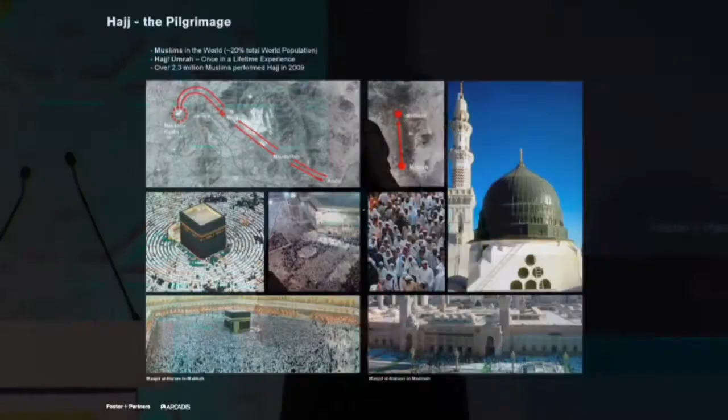Our interaction in Saudi Arabia started about 10 years ago, where we got involved in a project called Haramain High-Speed Rail, which is 4 high-speed rail stations linking the airport in Jeddah to Mecca and Medina, so pilgrims can come through Jeddah and then have this distribution to allow them to do it.

If you look at Haramain High-Speed Rail, it was 4 stations, actually very similar to Eurostar, but with probably 10 times the number of passengers. While Eurostar deals with 10 million passengers per year, we're talking about starting with 60 million and going up to something like 130 million.

What we designed, the stations are now finished and operational. We designed a modular system that could be manufactured off-site, brought to site, and assembled, designed like an airport. Because the passenger flows were so big, we had to separate arriving and departing passengers, and we came up with a framework which allowed through stations and terminus stations all out of the same module, but gave direct access to other modes of transport.

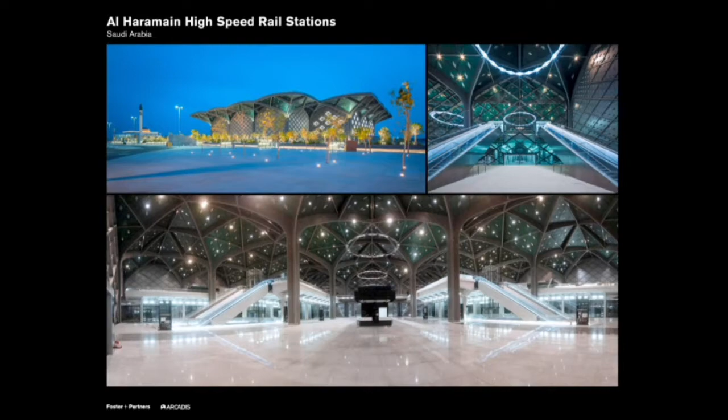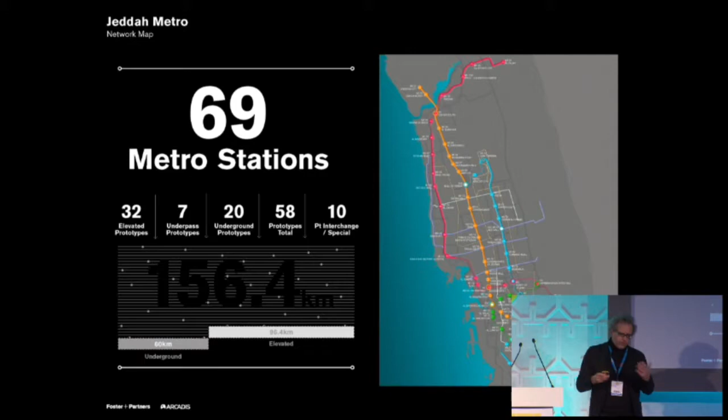When you look at the statistics of what we were being asked to do, it was something like 69 metro stations, 20 of them underground. We had underground, above ground, and interchange stations, all of which we had to design within the same framework.

We saw the ability that because we had a significant amount of overground station and viaduct, about 100 kilometers of it, the city had a distinct lack of public realm because people find it very difficult to go outside during the daytime due to the temperature.

But actually, the coastal area of Jeddah becomes animated at night when the sun comes down. So we thought, could we take advantage of the viaduct as being a huge shading device? It's significant, there was over 100 kilometers of it. If we did that, we could actually give back to the city something the size of about half of Central Park as a byproduct of putting public transport there, which we thought, absolutely, this is what we want to do.

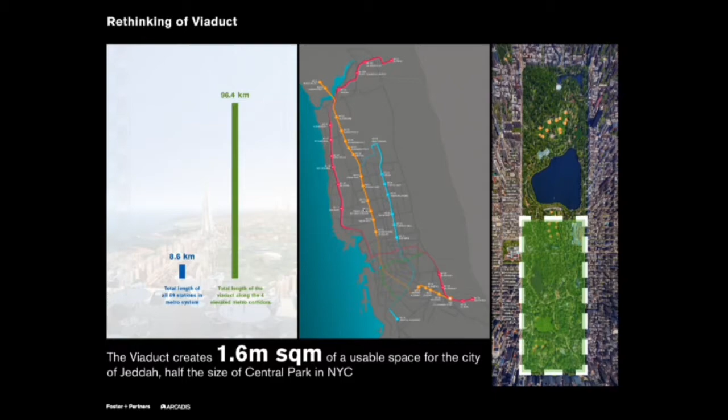There was also light rail tram and bus rapid transit networks. So the metro provided the north-south link, and the light rail tram and bus rapid transit provided the east-west links through the city. We had a ridiculously short period of time to design it.

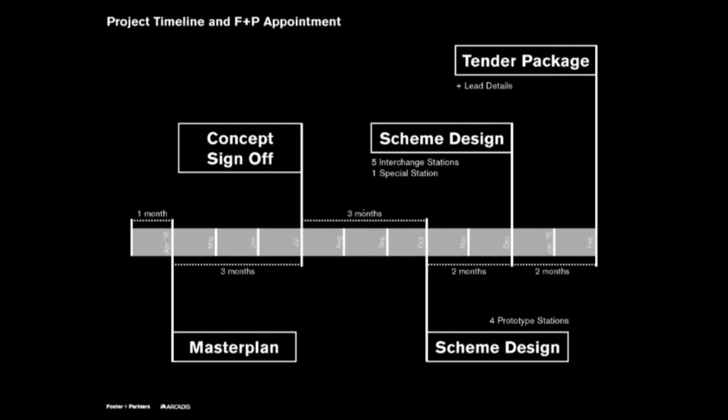They wanted it all finished in a year, so we had to give ourselves a very tight timescale and assemble a team within which to do it with the client. We weren't starting from scratch.

What happens with these massive transport projects is someone goes off and does a transportation plan, and in this case it was Systra, a very, very good company. But what they do is design a metro system, design a bus system, design a tram system, but they don't actually connect.

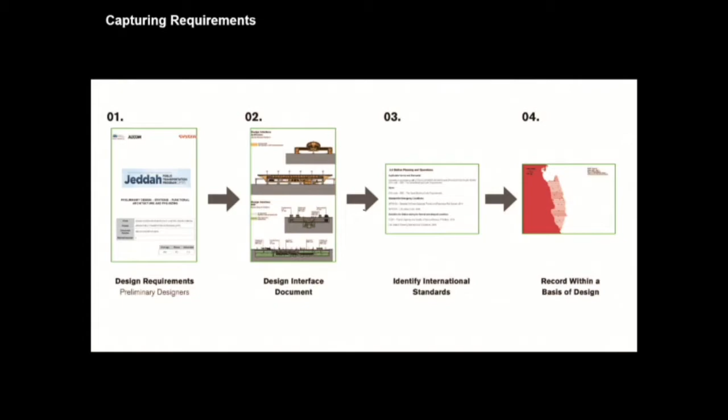They overlay it all, and it doesn't really work, from a city point of view. AECOM were off doing a build structure plan for the city, so we took all of that data, overlaid it, and played it back, moving the pieces around to help shape the solution. The scope was all-encompassing, from architecture to engineering.

We also brought in urban design. We were responsible for producing the cost plans. We chose to bring the real estate component into the project because we thought there was going to be funding. There was cultural identity to give it a local feel. We also produced branding, industrial design, and transportation design.

It was all about collaboration. So we wanted to create a culture of no surprises. It was only possible if the client was fully engaged in the sign-off.

So we amalgamated 250 people all together in one space. We created a design office in London and a design office in Jeddah.

And basically, we had a monthly sign-off process so that we never went backwards, we only ever went forwards. So the challenge for Jeddah Metro was, it's a sprawling urban mess, basically, 50 kilometers long by about 10 kilometers wide. It's grown from a small port in 1950 that hosted 50,000 people to a city of over 3.3 million. And just to make matters worse, 50 kilometres away from the centre core, they're building a 1 kilometre tall tower to host 200,000 metres squared worth of accommodation, to create a new town centre that far away.

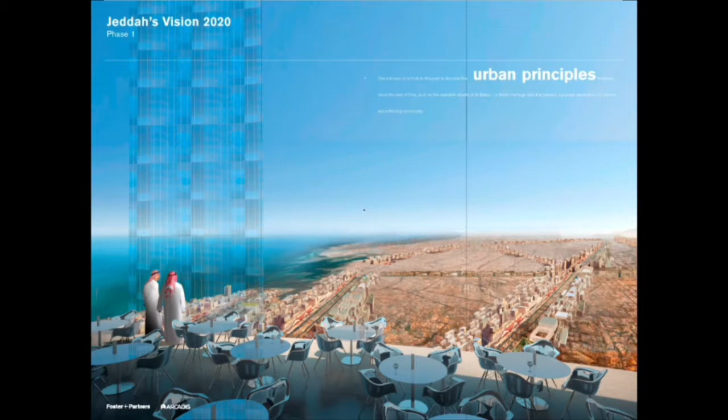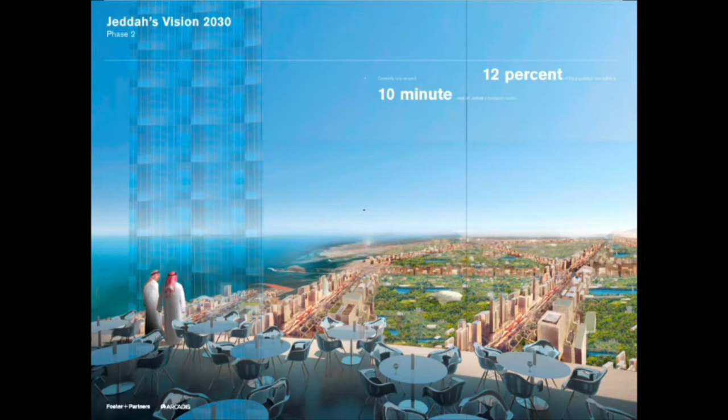So our challenge was to basically establish a plan. What we did was we looked at what had been planned originally and convinced them that to make the public transport work, you actually needed to densify around the public transport and not have this urban sprawl that went uncontrolled to the city. The original plan that we inherited basically had only 12% of the people living within a 10-minute walk of the public transport.

So we were, how is that going to work? Because you're going to have to drive to the public transport, to get on the public transport, and then drive to get to your destination. It's the wrong model.

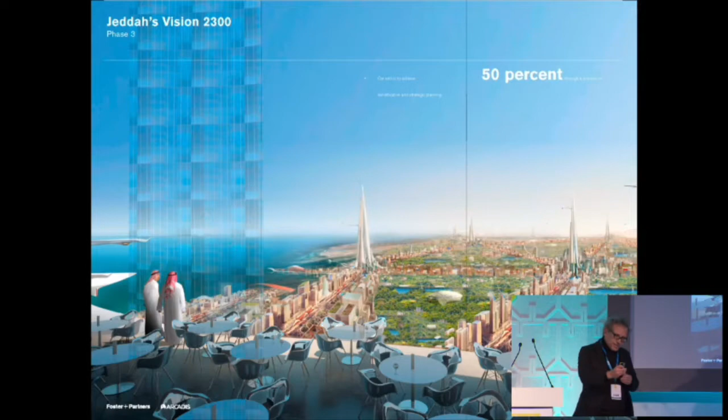We convinced them that the actual answer was to focus densification around the stations, with a particular focus on the interchange stations, and then begin to look at the lineage of the outer connections. What that does is it opens up the opportunity for much needed resources, such as recreation, food, power, to take place in the spaces in between the public transport.

So conceptually, we looked at a design where the stations should connect directly into the adjoining development and have landscape corridors that ran straight through it and retail corridors that ran the opposite way, then connect directly into another station that does the same thing. What this is actually doing is producing a network of public transport 1 kilometre apart that provides walkable distances in between and walkable neighbourhoods between.

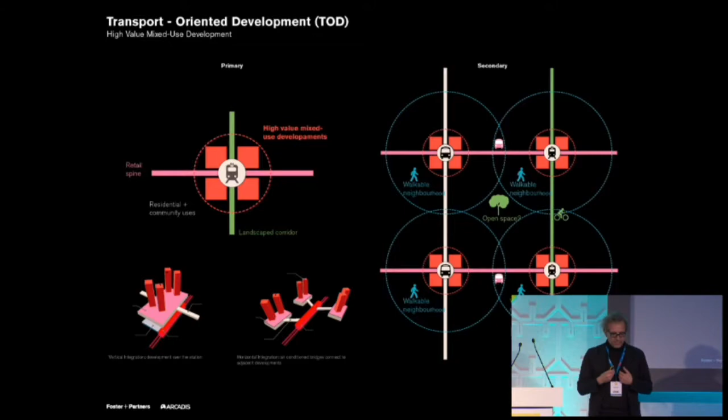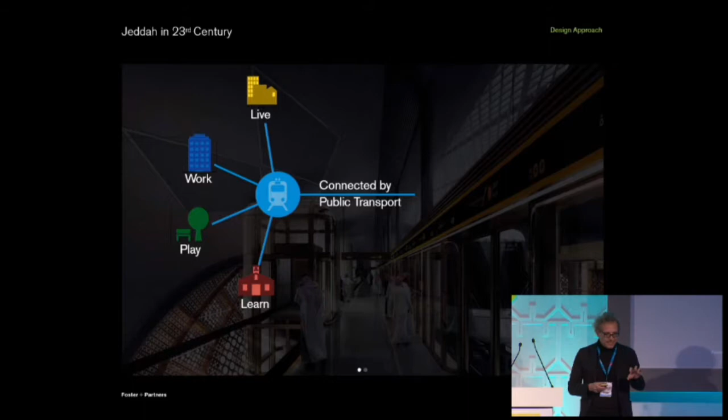It was touched on a little earlier in the discussion with Paul Finch and Andrew Worley, but this goes back to the old principle of what railway stations used to be. Railway stations really should be destinations where you have a mixed-use hub at that location, where you have live, work, play, all together, and learn, as a destination. Around the next station, 1 kilometre away, you've got a different mix, but it's a similar kind of hub, and you use the public transport to get between the two.

It was a full-on... oh, interesting, it's not playing.

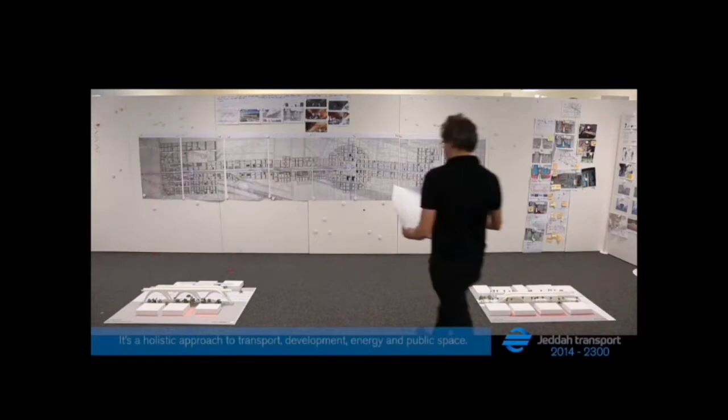So this was when we did the competition, we had to work very quickly. What we actually did was we had all this data to establish how to design it. But actually, we felt, let's put all the data down and create 4 separate stations, and therefore demonstrate how to deliver the 4 stations.

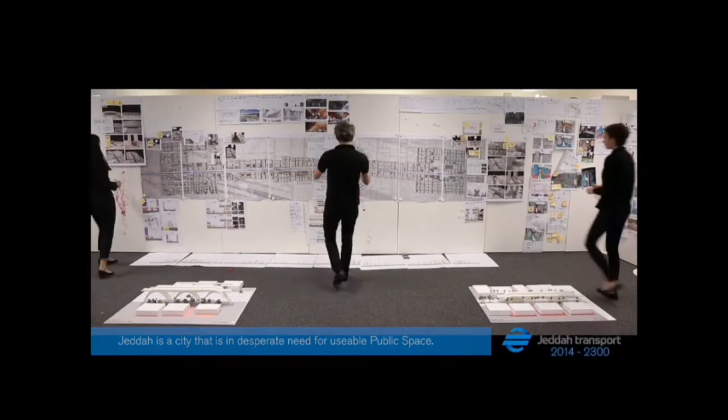We had how the station would work. We had all the criteria aside. And out of that, we produced a vision for how those 4 stations would look, feel, work, integrate, and grow the city around them. We also demonstrated through a sequence of models how you could phase the project, so you see here the station being in the center of the project.

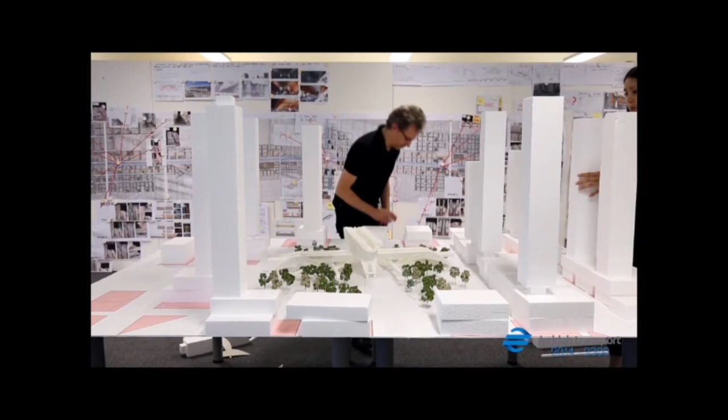When the station comes, we're envisaging that there will be real estate around there of prime value, and that will begin to develop around the station. Then you can develop the second line as it phases, and it could go over the top, providing direct connection between the two, so the densification would continue.

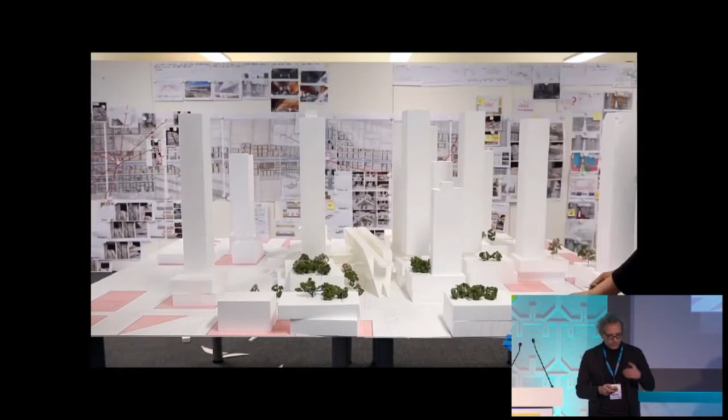As a model for how to develop this, we took the DNA of something we did in the competition, and our final solution just followed those principles. Ultimately, this is the scope we designed: metro stations, special stations, connection to development, BRT, and the branding, etc.

The rule we underpinned was, because we were building Haramain high-speed rail at the same time as designing Jeddah Metro, we actually had a test bed doing our testing for us. We were able to say, look, the design principles we originally sold you, you can now see them acting. One item was that when we took Haramain on, they wanted fully air-conditioned platforms and stations.

We said you don't need it. When you're on the platforms, it's a transient space. If you have heavy shading and good air movement, it'll be fine and it'll bring the felt temperature down. We were able to prove it to them, so we were able to use that evidence on the city.

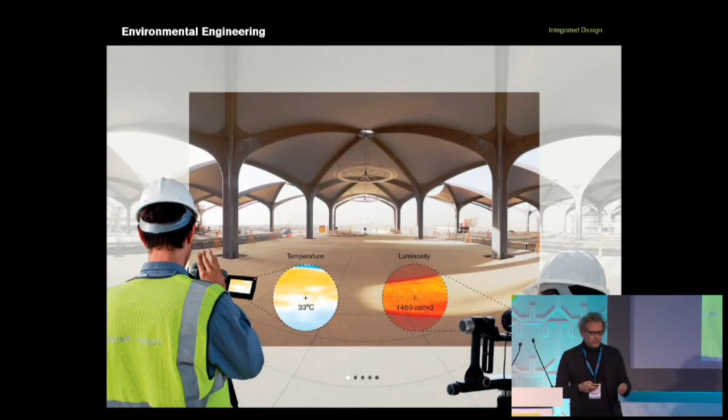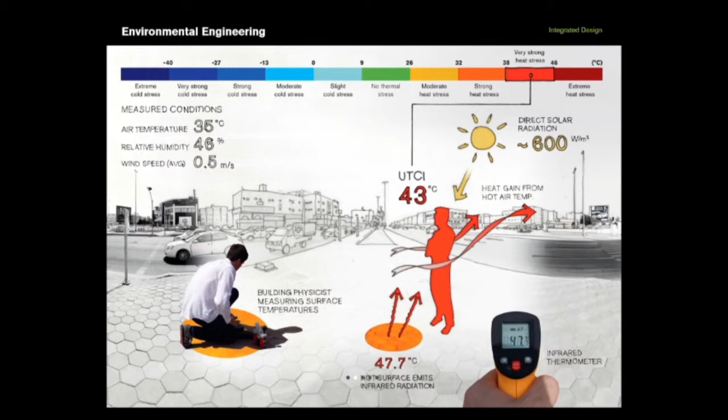Again, we went out into the city of Jeddah. We took measurements, looked at the direct effect of the sun, what it's doing to the urban realm, the heat it's kicking back, to identify the best way of developing these new stations, with the idea that you create an ambient temperature of somewhere between 24 to 28 degrees. We have good air movement and thermal mass within the station and the viaducts, creating a very sustainable approach to public transport.

In what is a very intimidating climate, cultural identity was interesting. We didn't want to come in as an international architect and impose our own aesthetic on this project. So we noticed something really interesting with Jeddah, in that it's grown so quickly there are no neighborhoods.

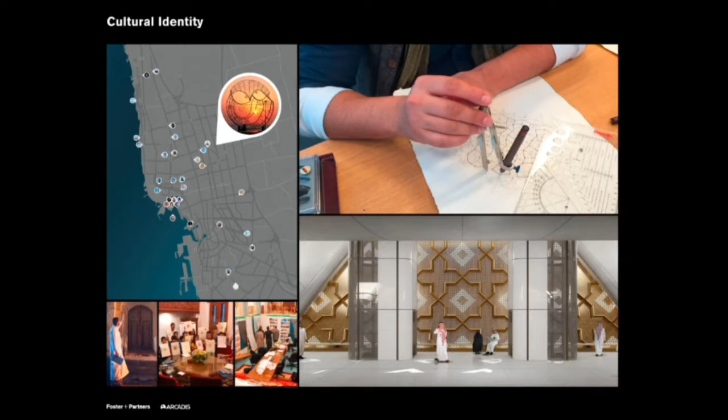What you actually have are these very peculiar sculptures, which anyone who's been there will have seen, in the middle of roundabouts, and public art has become a wayfinding device around the city. So we understood this big connection between public realm and arts, and we commissioned a sequence of 3 or 4 artists to work with us to help give the local identity and wayfinding components to the city.

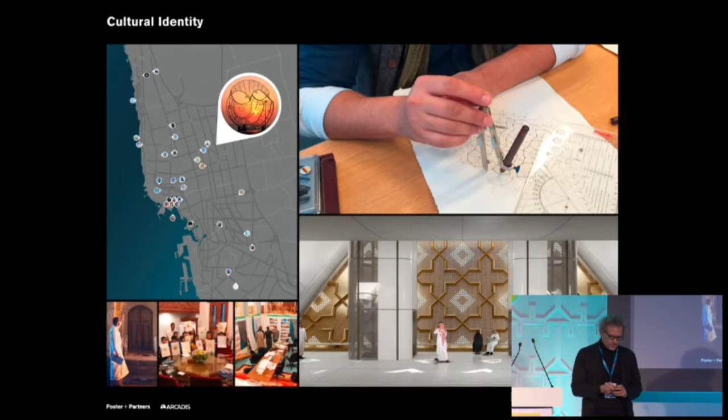So now to explain more about what we delivered: we actually delivered a metro station with 3 typologies. We had an overground station, an underground station, and an underpass station. An underpass station has to accommodate an east-west road, so it runs in a north-south direction.

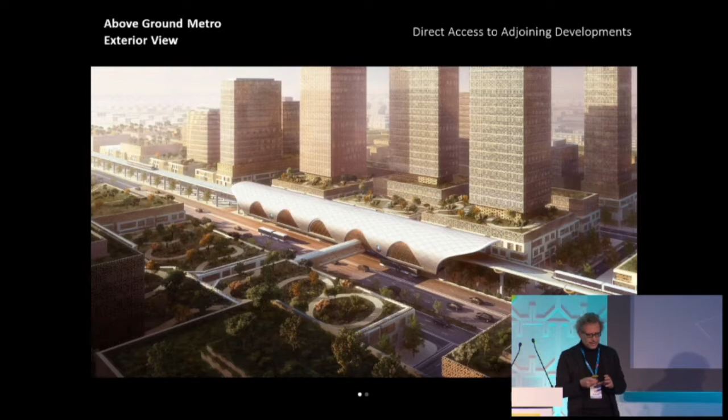This image ultimately shows our final vision, which was that the elevated station creates a pedestrianised public realm underneath it, for a pedestrian connection to other modes of transport. We also have these bridge links that connect directly into the adjoining development.

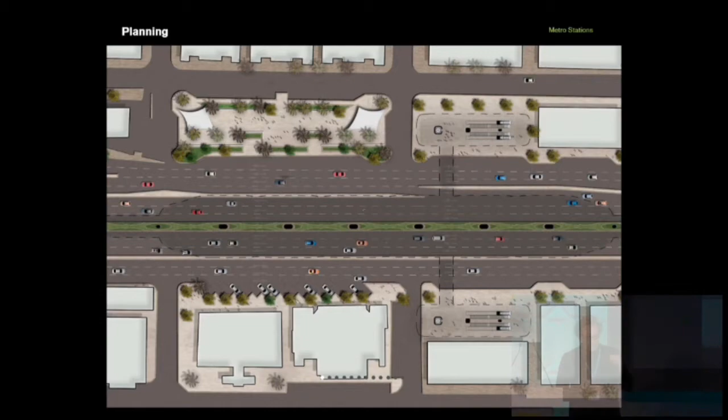If you look at what that looks like in plan, you can see some very challenging sites. Here, this was a 12-lane road where there was no way of providing a pedestrian crossing. So what we did was, we knew that in the future you don't need 12 lanes, you'll need 6 lanes, 2 lanes. It'll evolve, so let's design a station that can straddle it and put it up in the air.

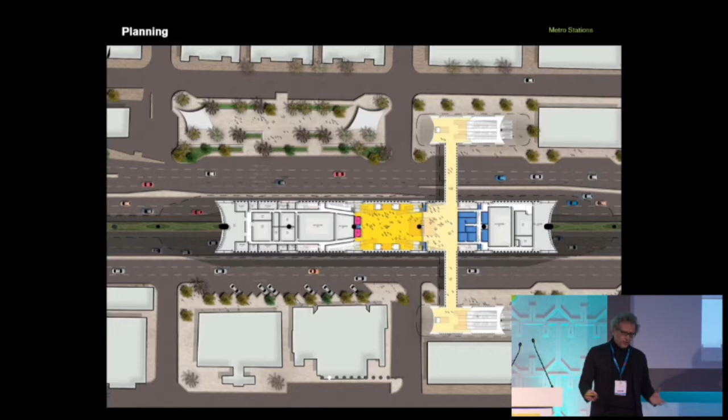At the beginning, it can provide a much-needed bridge link, so actually there's an unticketed bridge link. You come up the vertical transport, cross across unticketed, and come to the other side. The stations are easily planned so that on the right-hand side you have the ticket machines and staff areas, and on the left-hand side you have the gate line and concourse with access up to the platforms, with the ancillary buildings at one end.

And you go up then to a platform. The platform then gives you connection to the trains.

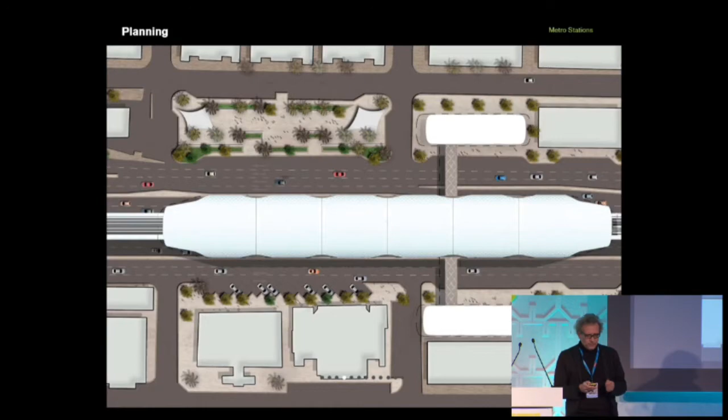We looked at this and we thought it needs a lid on it. Obviously it's got to keep the climate out, but there's real benefit in making this a modular system. When you look at the passenger numbers, some of the city is already there and it's very dense, so it needs a big station, but some of it's desert. It's future-proofed for capacity. So why would you build a station the same size in a desert with 1 or 2 passengers as somewhere in the center with thousands of passengers? So we designed a system that could be added to.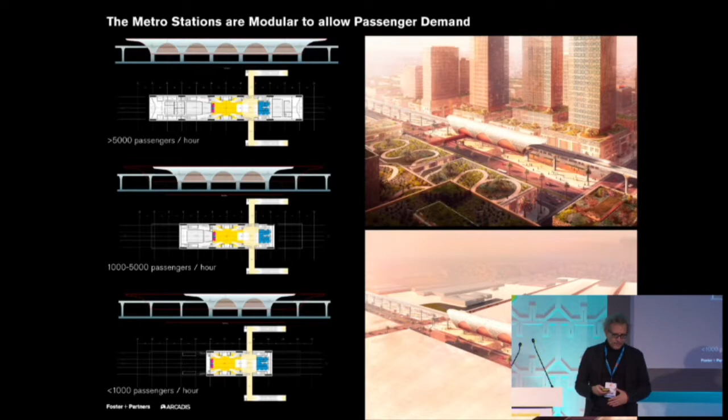We also looked at designing a system that could allow the road to not be 12 lanes anymore. As the public realm begins to move under the station, you get the benefits of shading, and the ability to come directly up into the station from below. The real estate on the left-hand side gains that public realm as part of its ancillary space.

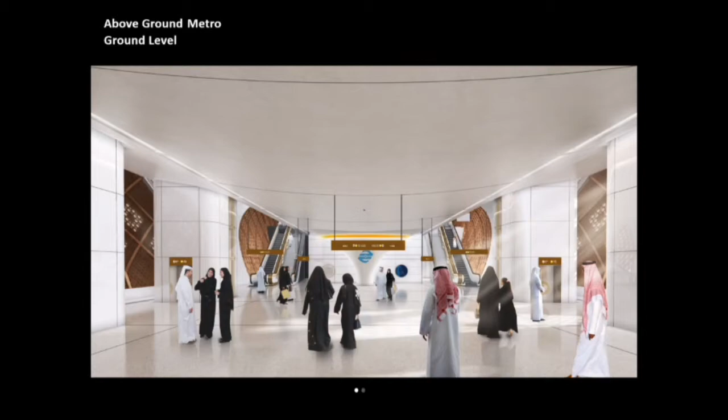You come up to a very simple concourse, which is minimal in the way of wayfinding. It's pretty obvious - you go through the gate line, head for the escalators, which take you up to the platform. From the platform, it's all carved away so you feel like you're part of the concourse, but ultimately you're directly accessible from the train, from the platforms onto the train.

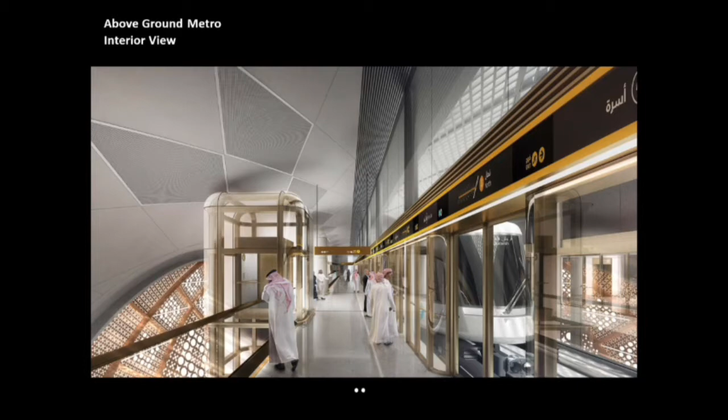You see here how we're envisaging that the real estate, the shops on the left-hand side, can occupy the space outside and take advantage of the lack now of the road. The road has moved to the other side of the station. It's part of a phased development, but it becomes part of a sequence of events.

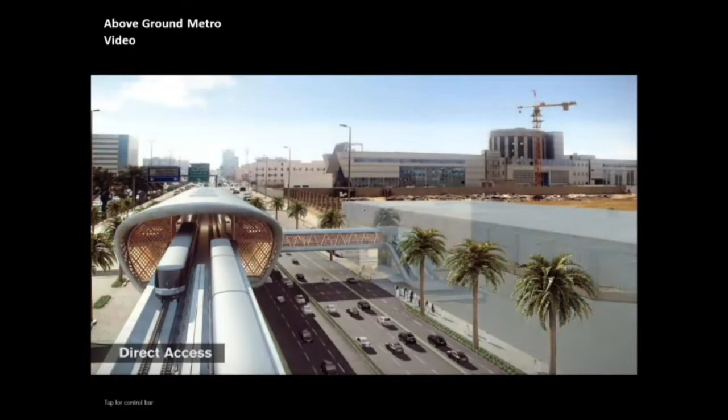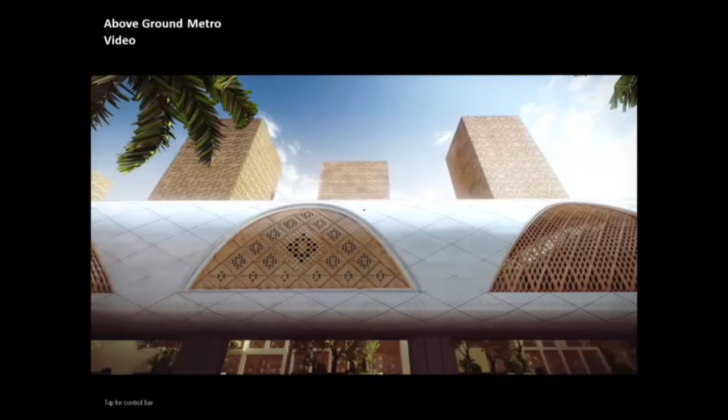This shows you the experience of how we're envisaging it to work. You'll come up the platform onto the concourse, and the concourse leads you directly onto the platforms. This also shows how the development allows transition of the adjoining development on the side, because on day one that development probably isn't there, but we don't want to preclude it happening in the future. If anything, we want to allow it to be a very easy transition.

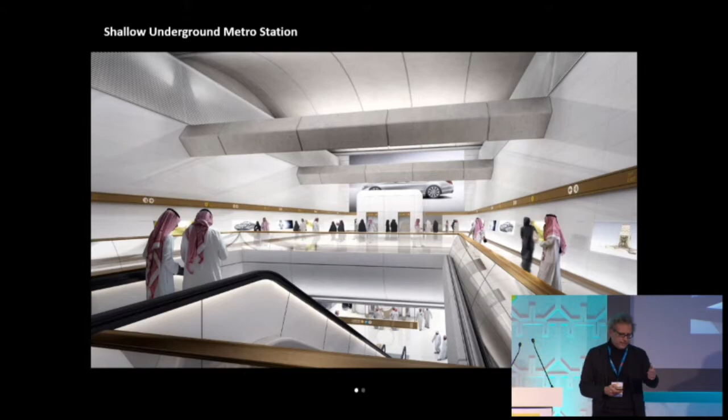The underground station works in exactly the same way. It has this unpaid route under the station, under the road, then the gate line, and then the station. Ultimately it's a shaded concourse that provides the linkage and protection at street level. We've designed it where we, as architects, express the structure, so you can clearly see the structure where props support the cut-and-cover box or the vaults support the road. And then there's a very clean ribbon-like wayfinding that runs through this platform.

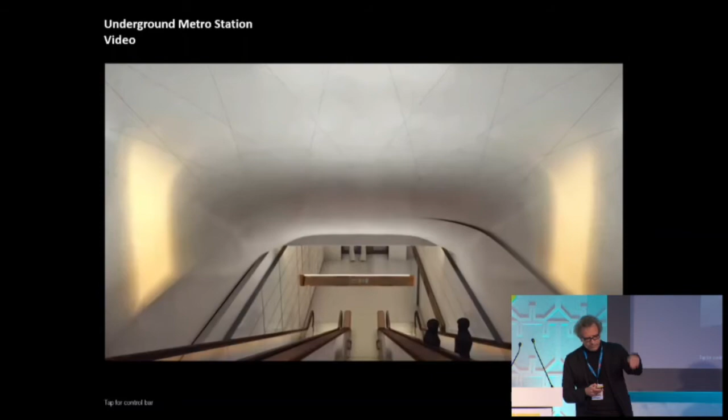This is a little video that just shows the sequence. You can see that you're coming through an unticketed gate line, down the escalators, through the gate line, and passing through the space down into the platform.

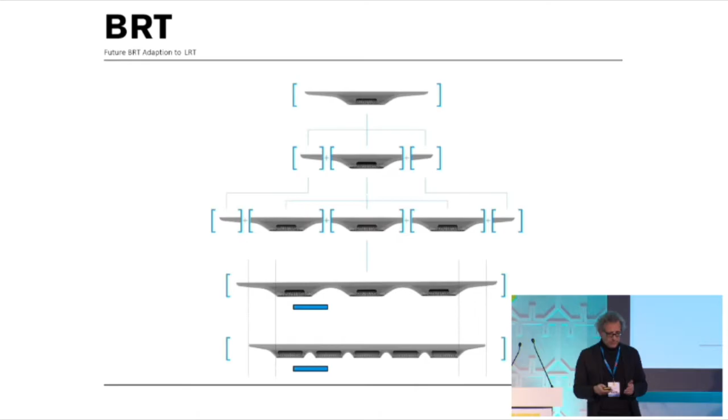We also found there was very little difference between a bus rapid transit system and a light rail transit system. So why are they two separate systems, and why does it cost so much to make the transition between the two? Why not design it as one system? So what we did was design it as one system where the bus rapid transit platform was 45 meters long, as you see here, and the bus runs on there. They both have a designated route.

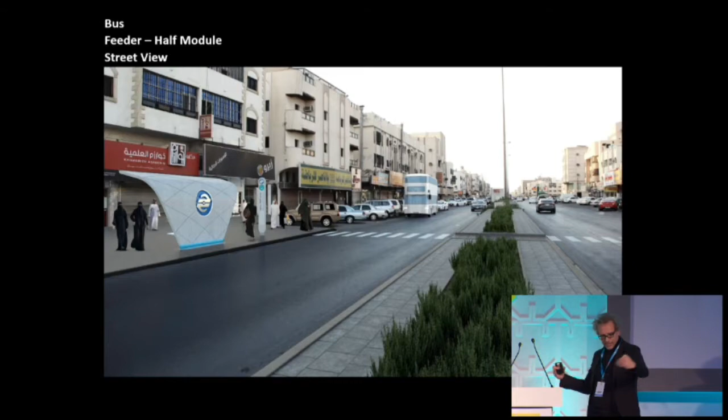There's also the ability in the future to electrify the road, and then you increase the length of the platform as the trains are 90 meters long and the tram runs through. We also designed bus stops - this was quite a challenge because we had many different sites. So we designed a very simple kind of branded sunshade, let's call it a shaded wall, that you put in the direction of the sun. You hide behind it and get clear access as the buses come linearly.

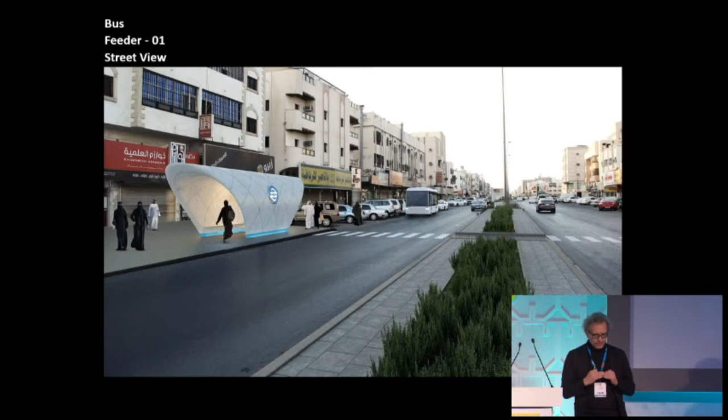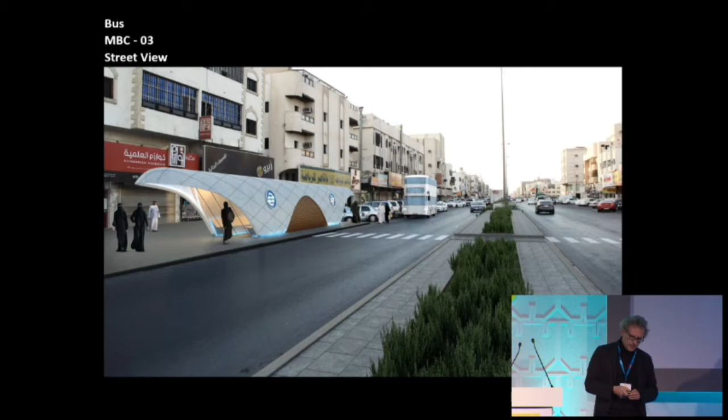Where we have slightly more space, we have the ability to attach two shades together, providing an immersive sunshade. Where you're coming into the more built-up areas, we have the ability to air condition it in the center. And when you get to the more dense areas in the center of the city, we have the ability to expand its length and size accordingly.

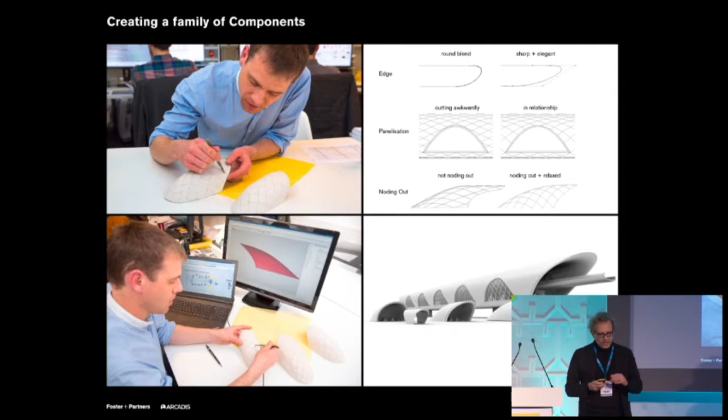We always wanted to create a family of components, so we worked with our parametric team in the office to make sure all the curves were within the same parabolic architecture. So everything from the metro station, underground metro station, to the bus stops, they were all part of a family, and therefore you could see they were all of one hand.

The rolling stock, we also wanted to produce our own unique rolling stock. We wanted a piece of timeless classic, something instantly recognizable as being Jeddah. We loved the Zeppelin, we also loved the Airstream caravan, and we thought something that reflects the sun and takes on the impact of its surroundings was really interesting.

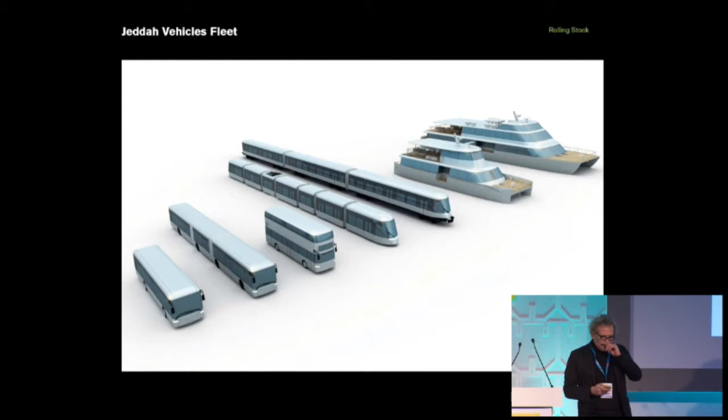So we were able to produce a fleet of transport where the trains and ferries, you were able to completely transform them, whereas the buses you had to work within certain constraints. But we were able to shape them, giving them all this highly reflective bullet-like appearance, which gave it a clear identity. But there's no point designing this if you can't afford to build it.

So we had Jones Lang LaSalle in our team, who did a huge piece of work for us. Originally, the client wasn't really bothered about how to fund it, because the PIF were just going to put their hand in their pocket and pay for it all in one go. But the oil price dropped, and suddenly that's no longer feasible.

So we thought, hang on a minute. The value of building public transport and the impact it has on land values around the station - why do you have to let the private developer just get richer? Why don't you bring that money, that value capture, back in to help fund the public transport?

So we looked at the market research. We did an audit of all of our stations to look at the profile, the built opportunity, to then grade them, with the intention of producing a ranking of all of our stations. The top four biggest opportunities we saw as the chance to create special stations.

These are the four. One was obviously the Haramain high-speed rail station, because you've got 60 million passengers all trying to get off at the station, so it's an obvious opportunity. The second, Old Makkah Road, is the last station on the way to Mecca - again, a huge opportunity, but I'm not going to talk about those two.

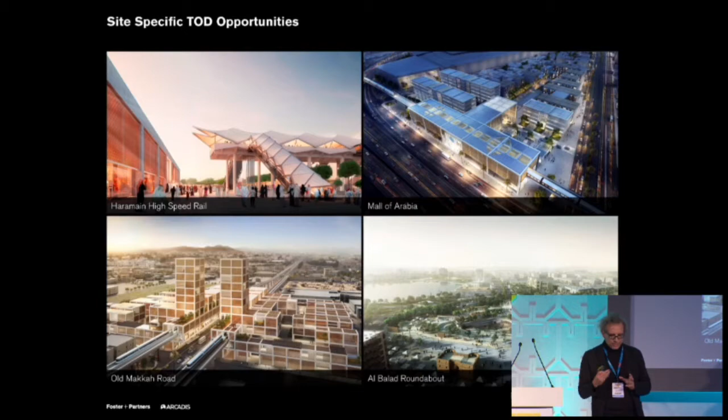The two I'm really going to talk about are Mall of Arabia, which was a very interesting site, because here you had an overground station meeting an underground station right on a triangle of unplanned land. And the mayor wanted a catalytic effect of the station to transform this area. So we took the opportunity to create a vision for how the station could be.

So you have the overground station, and the underground station is the T coming off to the side. Over the top of the underground station we have a linear park. We have a shared entrance around the back, which is the white building right in the middle, and then we have commercial next to the station, real estate, residential on top of retail around the park at the back.

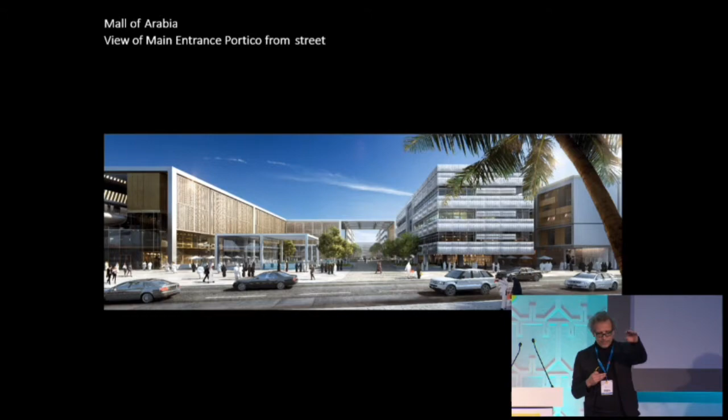The station and the commercial shared an entrance. As you came in through the entrance, from the drop-off, you have clear visibility of where the trains are and your way of getting to and from the trains, all the way up to the platform. So there's a linkage between all of the levels for good daylight and visibility, all the way up to the platforms.

But in many ways the most interesting slide I think about this was actually a business plan, because we were in control of the costs of the buildings, so we knew how much the station cost, we knew how much the real estate cost, and we knew the market. What we were able to do was illustrate that there's a proposition here - the real estate will pay for itself in 14 years, and it can pay for the station in 20 years.

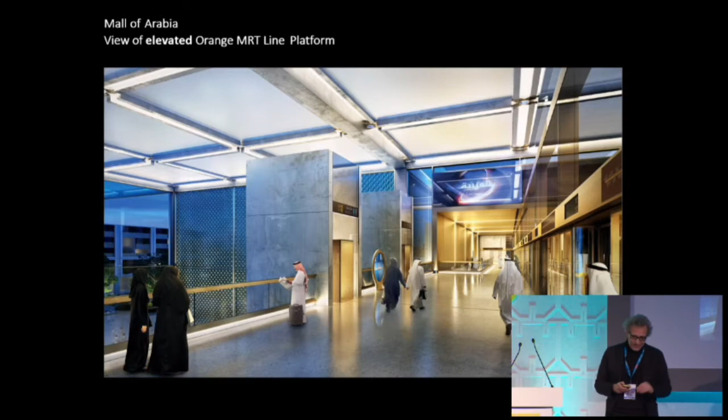That was probably the single most important slide that I've presented, it's sent me a lot of projects since then.

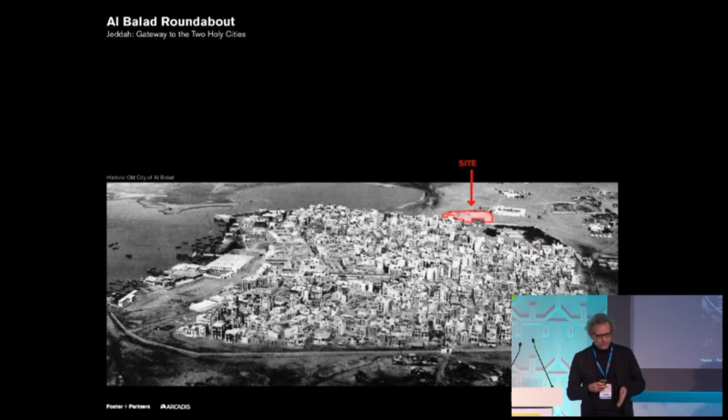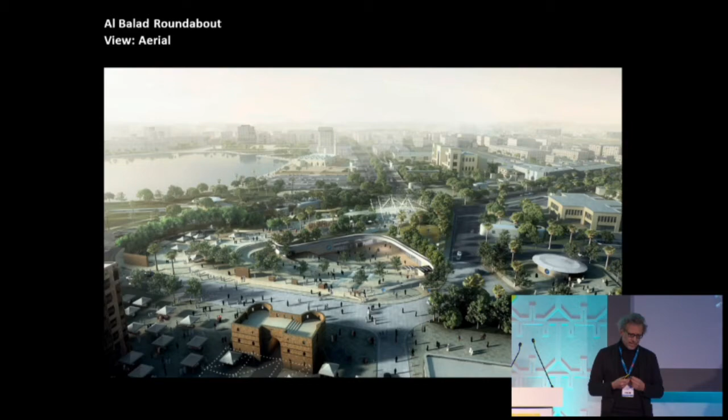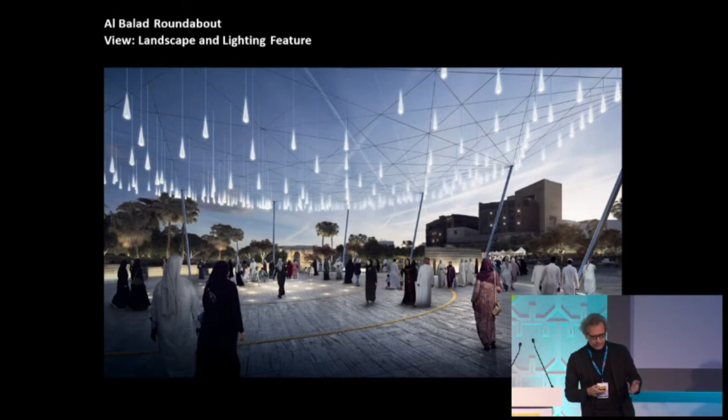We saw the opportunity, having to design two stations that form a cross right in the middle of a traffic interchange. Rather than build the obvious building on top, which everybody was pushing us to do, we said we're not going to do that. Instead we'd create a publicly accessible park, change the road traffic network so it's pedestrianised on one side, so you can walk directly from the station through the gate into the city, and create a much-needed public realm. Use the required investment money to regenerate the city, upgrade and put new cultural buildings, new real estate, new hospitality buildings within the existing buildings there.

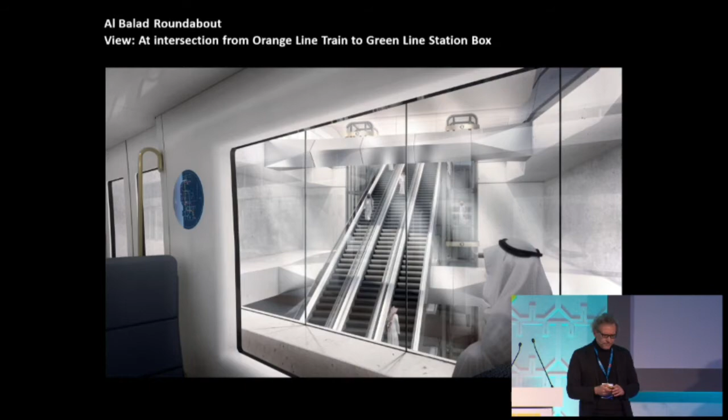We created a sunken courtyard for the entrances. We wanted connections so that from both transport lines passing through there was a link - when you're on one train, you can see the other train, creating an interesting crossover, given that it's the historic station at the centre of the historic city. We also allowed public transport to come all the way through.

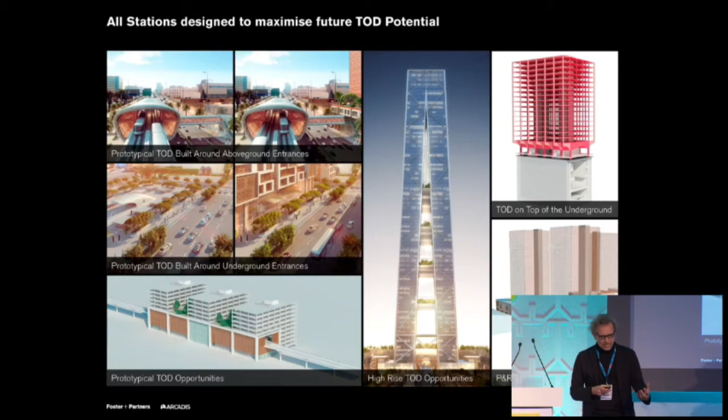We also left Jeddah with a set of rules about how they could transform our stations in the future when the real estate partners came on board, be it overground or underground stations, and we showed them how to do it, and gave them the rules.

Ultimately, what we were left with was a 12-month period where we designed 1,000 components, but we had a common vision throughout. What I'll show you to the end is really a vision and presentation that shows how it all comes together - the evolution of the city from that small fishing port in 1950 through to this global metropolis of urban sprawl in 2019.

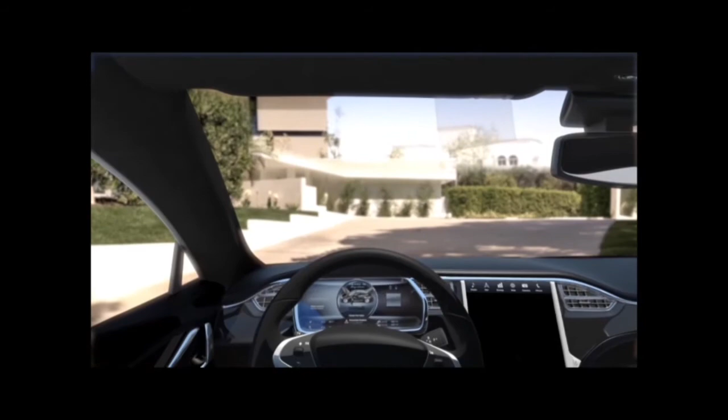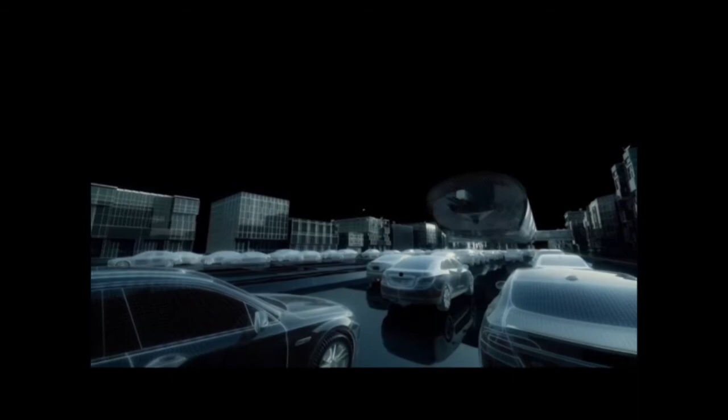We were designing all modes of transport, the map, and how these modes connected, but we still had to communicate to the people of Jeddah what we were giving them, and why. This is the life they know - sitting in traffic jams, delayed getting from A to B. Funnily enough, when they leave Jeddah and go to London on holiday, they'll happily jump on public transport, but in their own country they don't see the benefit of it. So we were trying to say, look, this will allow you to speed up connectivity exponentially, and they'll be part of a family.

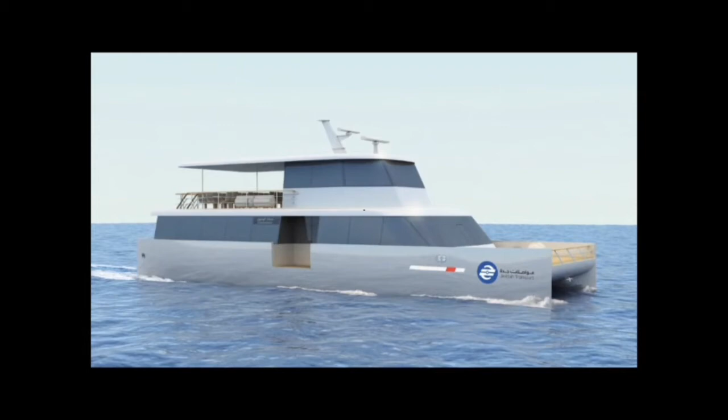These were our trams, our metros, our buses - double-decker and single-decker buses, BRTs that were connected, water taxis and ferries. We also designed the industrial design components, all the furniture - inside had a bronze feel, externally had concrete for durability - a language that would run through the entire city.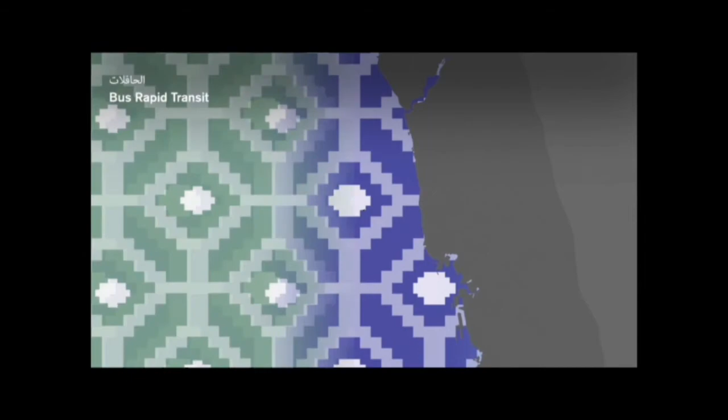With the artist's involvement, we gave a unique identity to each of the individual lines - the patterns and materials became something that gave its identity. Now we'll go on a journey to show you through the station, coming from the platform in an interchange station. You see the red line in the signage, and you come up to the concourse level.

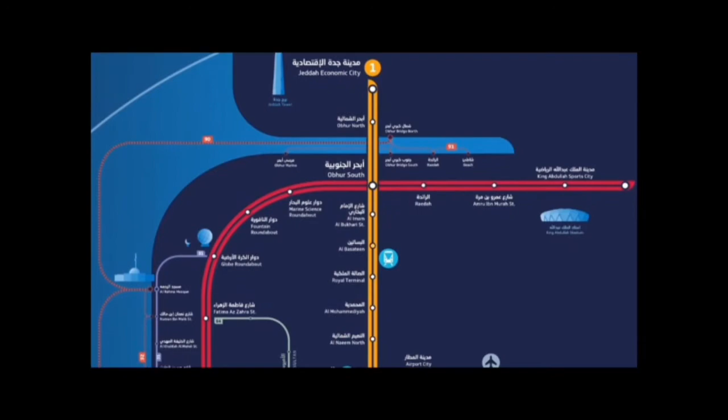Again, very simple kind of big, open, naturally daylit spaces to bring you up to the platform. From the interchange station, you have direct access out to the bus stops, from where you can get to the outer reaches of the city.

As you come through here, you come directly out of the station. The first thing you see is the BRT network, the station. This now is the public realm.

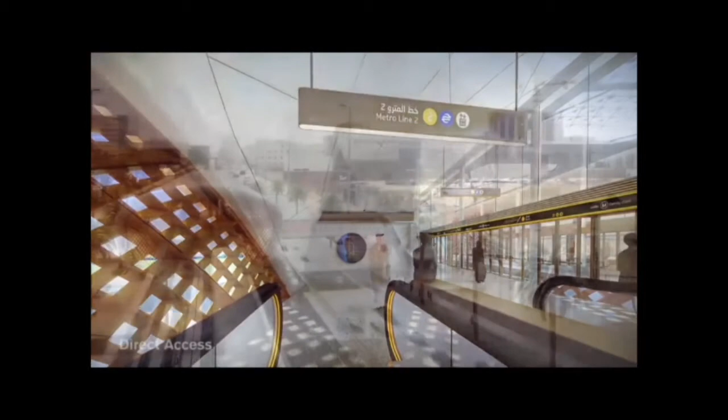You come from the public realm up to the concourse. The concourse is intuitively bringing you to the platform, showing the transition of the urban development and densification around the station, giving them the vision of what the city could be like in 20 years' time.

Each station has a unique identity, a different kind of look and feel, given to us with our local partners. The messaging of the benefit of the public transport system is going to help them with their everyday life. This was something Jeddah Metro themselves were very happy with.

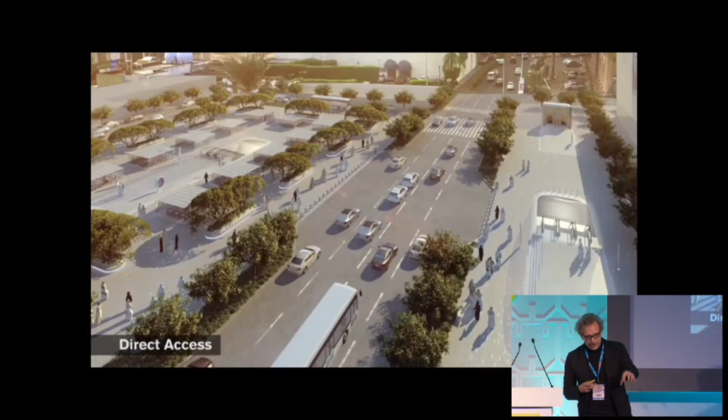This shows you the transition of the underground station becoming part of a bigger development. You see here the natural routing through the underground system as you pass down to the platforms.

And how you get onto the system. This is then showing you the experience of coming through Al Balad station.

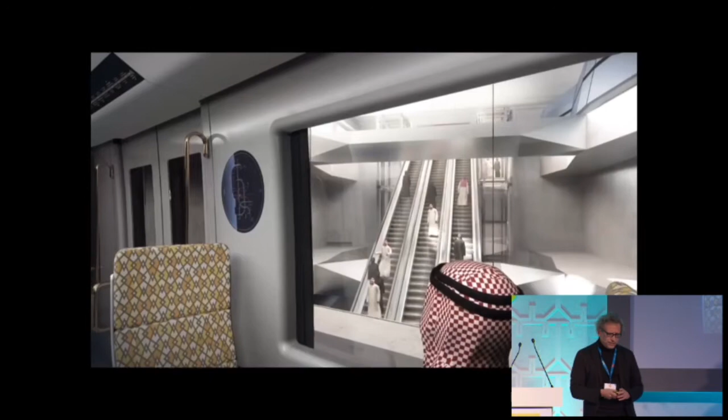Again, this is the new public park that we've created. The experience of passing through that sunken courtyard, down through this very dramatic interchange between these two stations, the experience of the passenger as you pass from one stage to the other, the natural daylight coming all the way through.

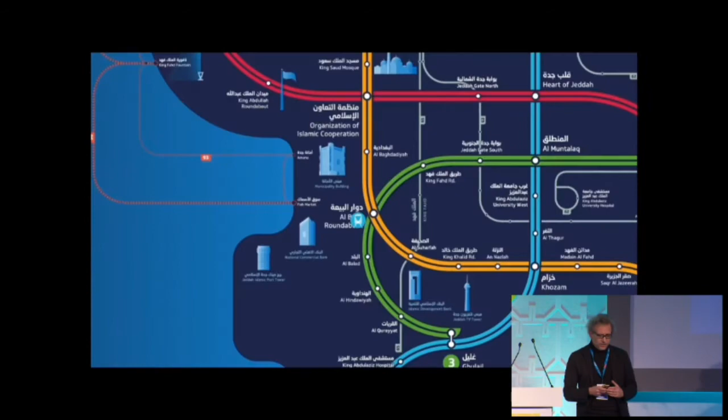The very important part that the Mayor of Jeddah played in enabling us to work with the rest of his team. Again, it was a very simple transition between the interchange stations when you go from platforms to other stations with a shared concourse.

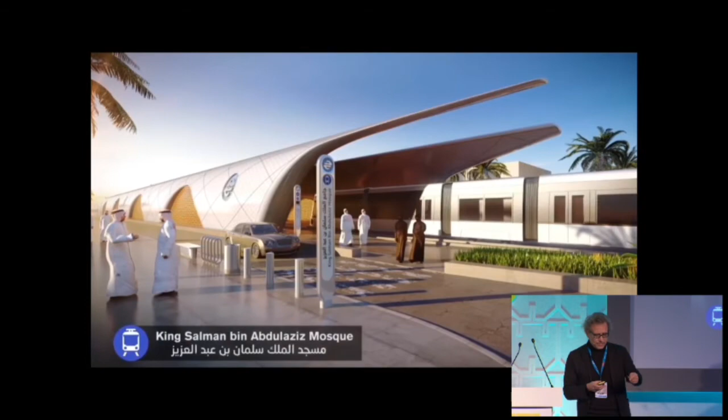And the interchange connection. You also see from the connection when you come up directly between the metro and the adjoining tram. This is showing the tram with its 90-meter-long trains. You see here the air-conditioned cabins that are off to the side.

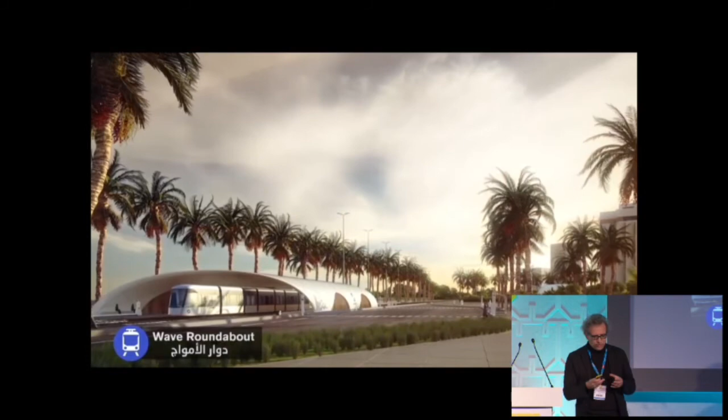You have running along the Corniche, a Corniche tram, which was just a very simple shaded structure that allowed the trains to run. We then have the water taxi and the river boats travelling up.

And most importantly, to end, we had this vision to show them that this investment in the public transport system we were building today and in the next 20 years would actually be sufficient to give them benefits of the spaces in between the stations.

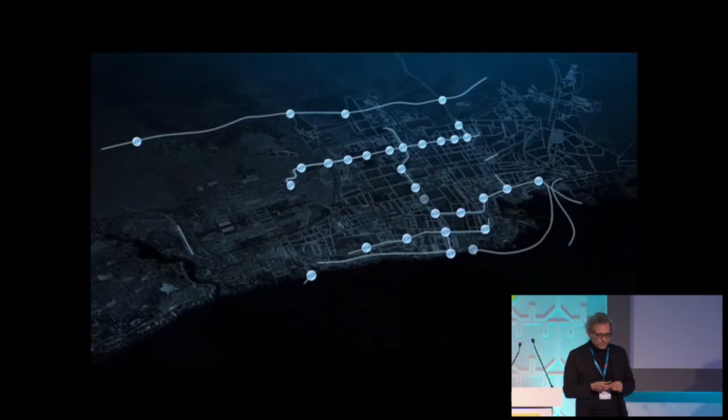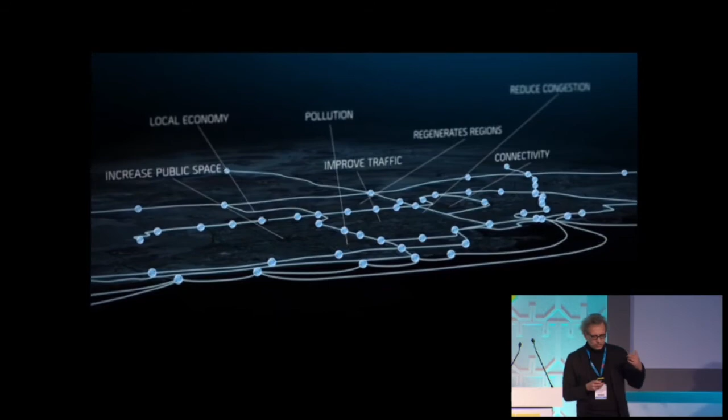So you can see here the benefit you get because you've now densified around the station. What we can deal with is many of the problems they see today, such as pollution and the lack of public realm. Suddenly you've got all this open space between the stations to actually open up.

And then in the future, buildings and vehicles will have changed. This idea of flying vehicles coming to the top of towers rather than condensing the underside of towers is a very different vision, but the investment they've made in the next 20 years is still there and has still dictated the plan of the city. Thank you. This is the vision that we hope we'll see one day.

Thank you very much, Angus.

I mean, that was a very compelling presentation that makes me almost want to move to Jeddah. Would you like to sit down? Yeah. We can have a couple of quick comments, I think.

My reasons for saying it might make me want to move to Jeddah is because it opens up the possibility of making the public realm so integral to the experience of the city. I could see those trams or trains or even the buses becoming mobile cafes. There'd be a strong case for having cold water available on them for obvious reasons, but maybe you have a coffee as well. So you've set up a platform for doing something really interesting there.

Yeah, but I think the point, I would agree with you, the most compelling point is the way it's worked with value capture. This is something that happens with transport hubs, but also art galleries tend to create value in the areas around them. It's very difficult, and with the exception of this project, I'm not aware of anywhere that has succeeded in capturing the value created by a piece of investment and using it to maintain that public facility, be it a railway or an art gallery.

Could you say a little bit more about how it works?

What was interesting for us was that this Jeddah project was probably 4 or 5 years old now, from when we first took part in it. But the one thing they did, which was different to any other client I've ever come across, was they said, I want an architectural-led project, not engineering-led. All these projects are normally engineering-led. And I want a vision for how it can all come together. So in many ways, we're still waiting for Jeddah to implement this. This is a 20, 30, 40-year plan.